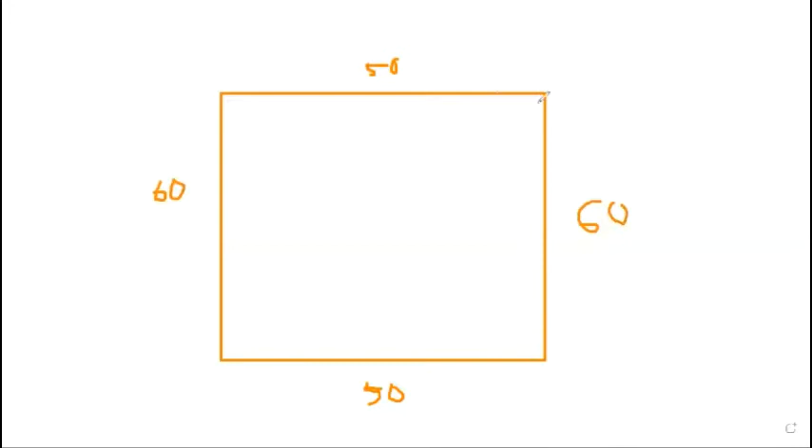Then by protractor, draw a 90-degree, and you measure this line 50 millimeter. Here also measure 60 millimeter. Again by compass, from this point by 60 millimeter, you draw an arc. Here also by compass, the point of the compass here, and draw the arc here. So we can draw this rectangle first. Very lightly draw.

Then in these two vertical lines, measure 30 millimeter from this point. From this point, measure 30 millimeter. And here also measure 30 millimeter, and draw the center line. This is the chain thin line.

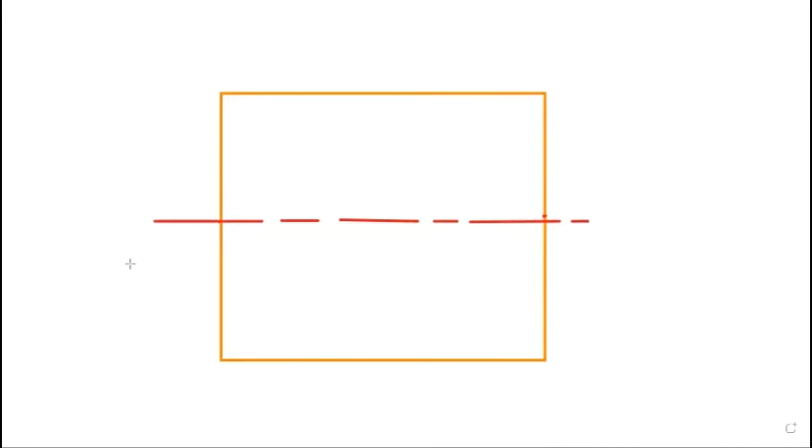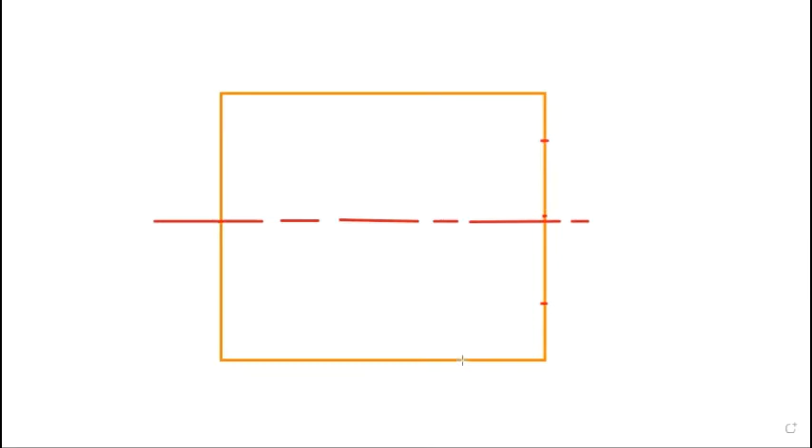Now you see from the top and the bottom, there will be 16 millimeter. So here you take 16 millimeter. Here also take 16 millimeter. Then at this point, draw a line 10 millimeter. Draw a horizontal line, means parallel to this line, or 90-degree of this. Just 10 millimeter.

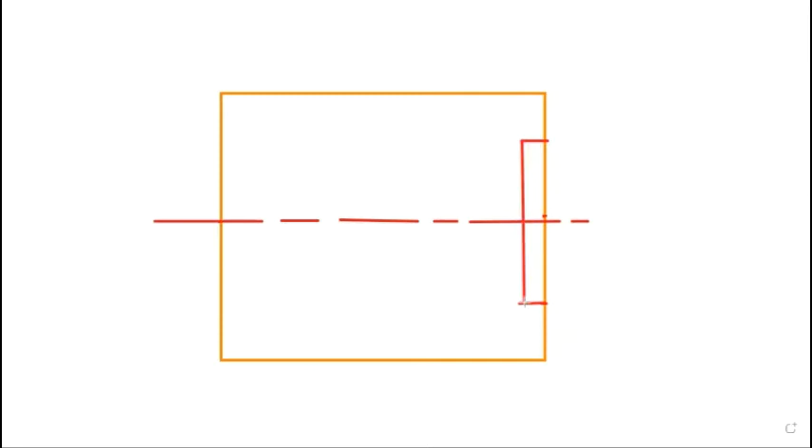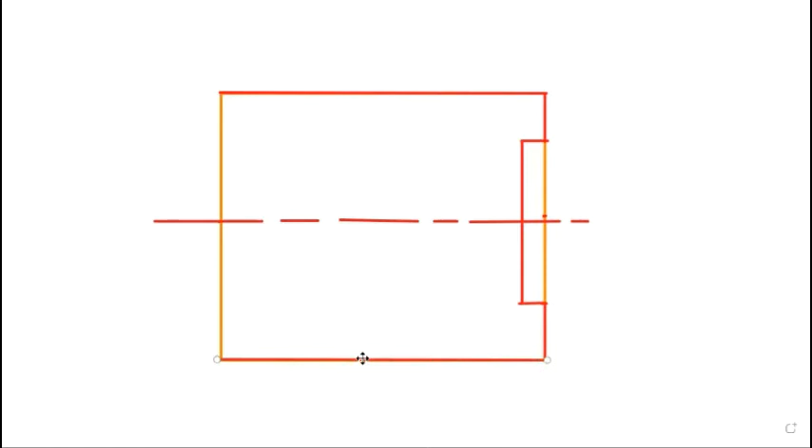Similarly, here also draw a line 10 millimeter. Then draw a vertical line, both sides 10 millimeter. So then the figure will be this one. This is the 50, then 16 millimeter, then 10 millimeter, then 28 millimeter, then again 10 millimeter, then again 16 millimeter, then again 50 millimeter, then again 60 millimeter.

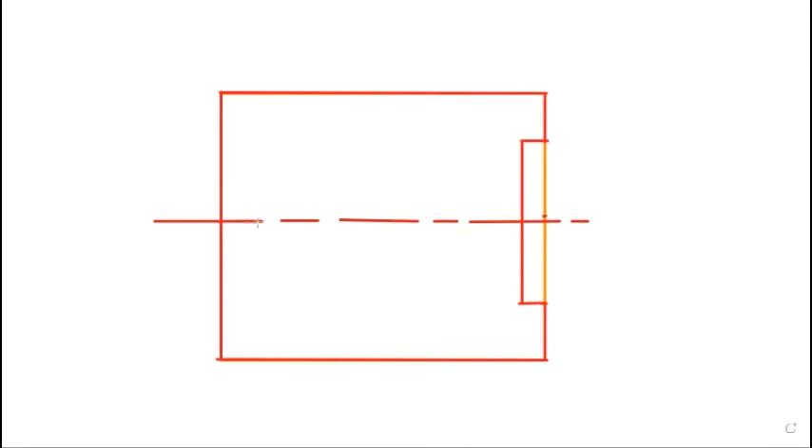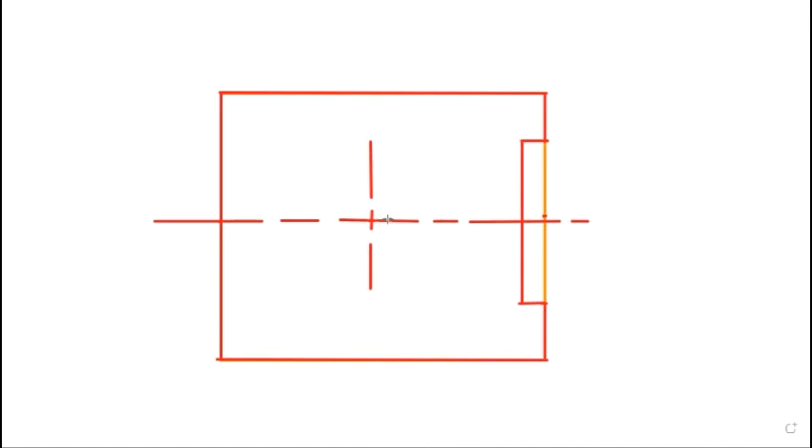Now you have to draw the circle. So the circle center position will be 30 millimeter. Already we drew the center line at 30 millimeter, and the horizontal distance is 20 millimeter. So suppose this is the center point. So here we draw another center line. Now here the phi, the diameter of the circle, is given 16. Phi means diameter. So using the radius 8 millimeter, draw a circle.

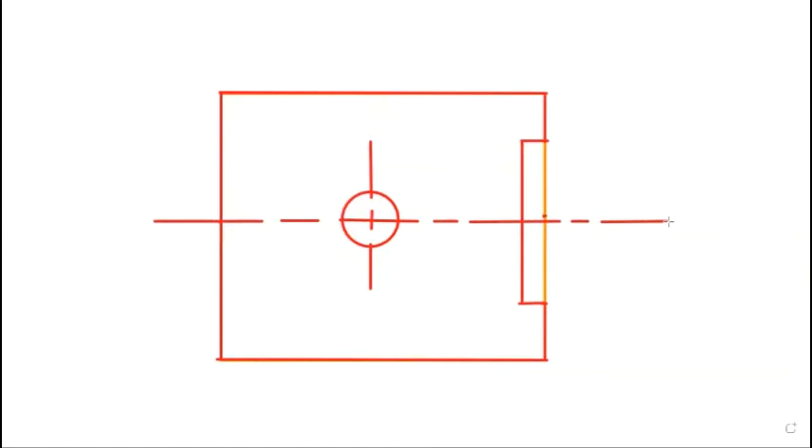So this is the figure. Now at a certain distance, again we extend the center line. And here also draw a center line, vertical center line.

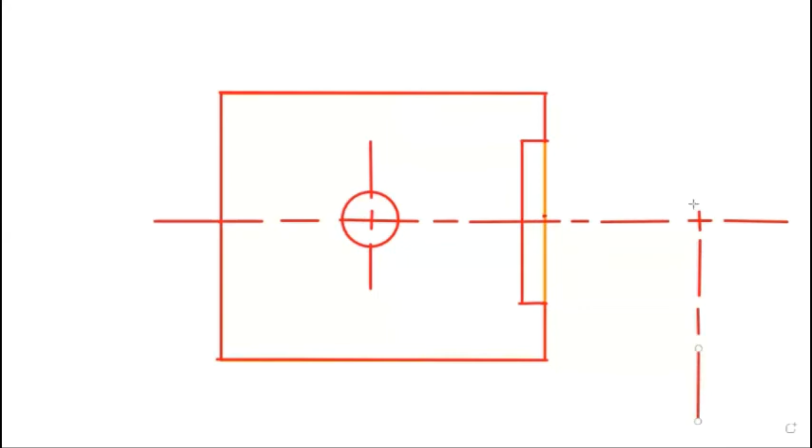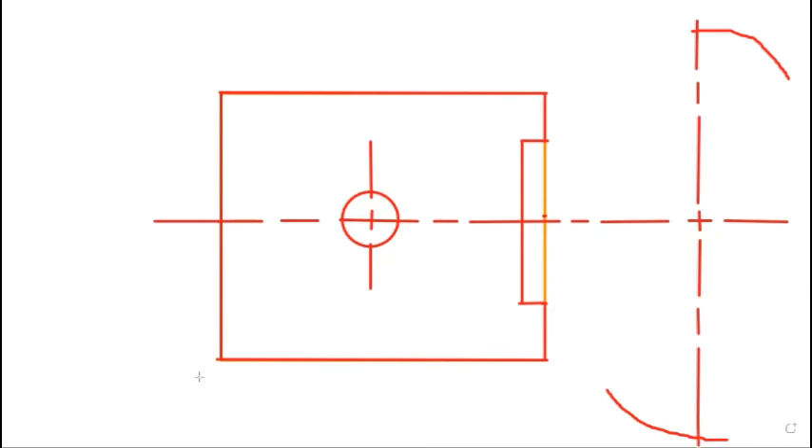Now, here you see the diameter of the arc is 80 millimeter. So on this side draw an arc like this, on this side draw an arc. And now we draw this arc by taking 40 millimeter radius. Now give the dimensions. So two figures simultaneously.

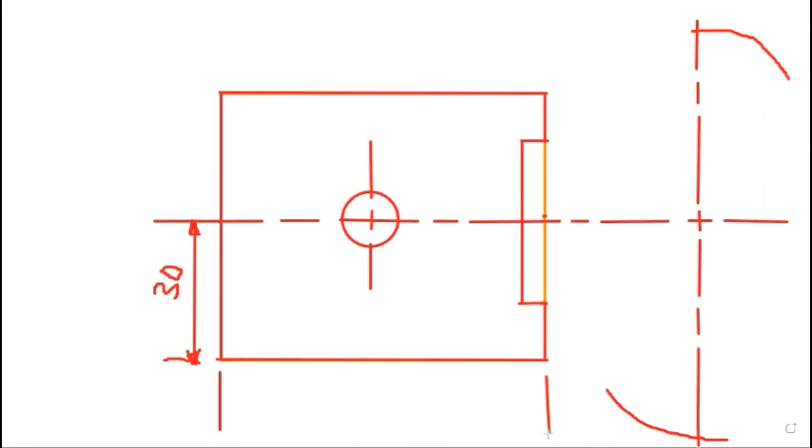So if we draw the dimension, basically when you give the dimension for the aligned system, this is written like this. Here you have to draw the arrowhead. And for the lower side dimension, suppose this is 50. Draw first the extension line, then draw the dimension line, then write here 50. And here I also draw the arrowhead.

And when you draw the arrowhead, always 3:1 ratio must be maintained. So this is about how to draw. First you draw the rectangle 50 cross 60 very lightly. Then this portion take 10 millimeter inside. First from the upper and lower portion, both measurements 16 millimeter. This is 16 and this is also 16. Then 10 millimeter inside, here also 10 millimeter inside, and this distance will be 20 millimeter.

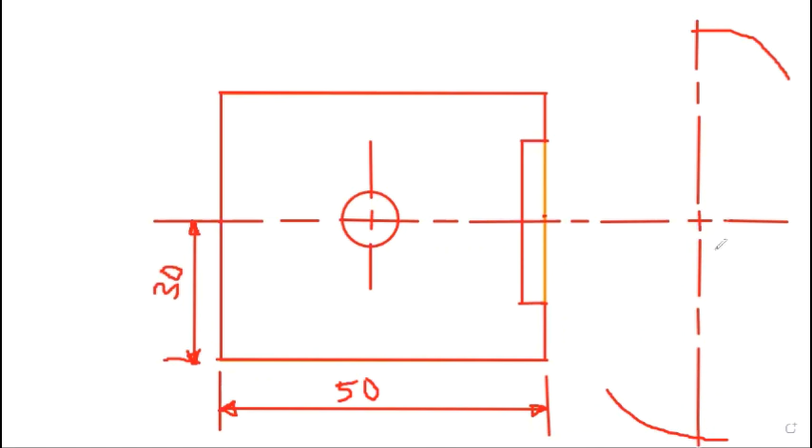Clear? After that, leave some gap because you have to give the dimensions here. Then draw the arc with 80 millimeter diameter. Both sides, first draw the center line. Then the lower side will be left of the vertical center line, and the upper side will be right of it, and give the dimension. So this is basically the aligned system.

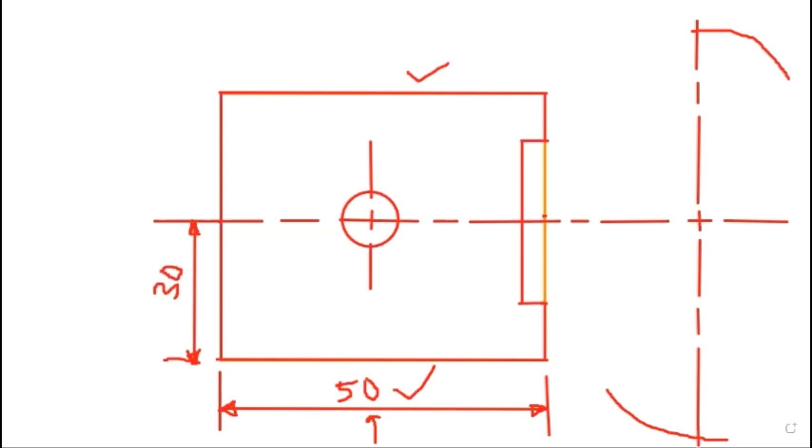In the aligned system, when you give the dimension for the upper and lower side, your eye will be here, below the drawing. So give the dimension above the dimension line. If you give the dimension on the left or right side, your position will be here, on the right side. So your 30 will be written this way. The 16, 28, 60 are all written this way.

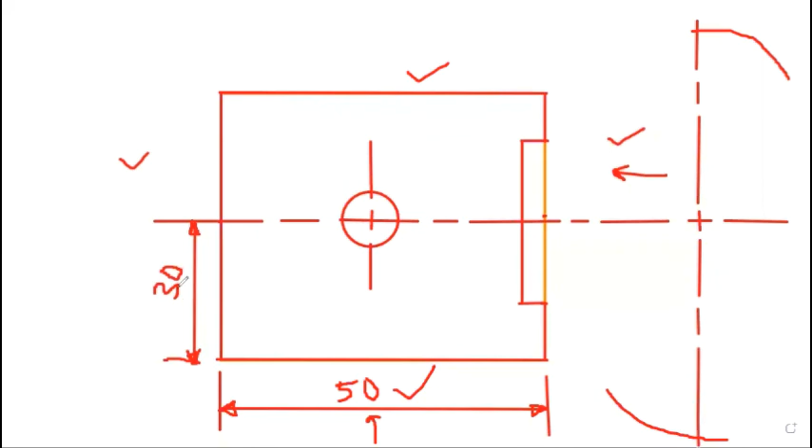And for the unidirectional system, you always see from the bottom of the picture. Here the dimension will be at the middle of the dimension line. Left side, right side, all are in the same direction. And the writing will be inside the dimension line.